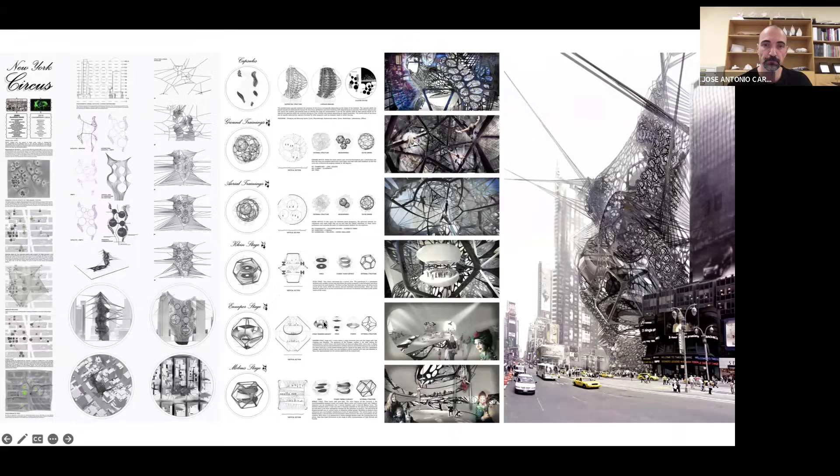As I mentioned, this was a great opportunity for me to deepen into Rhino and Grasshopper, which helped me out later to teach these tools at the university. This project was showcased and published in the third issue of the Evolo Skyscrapers volume, so anyone interested in knowing more about this New York circus can approach the project through this presentation.

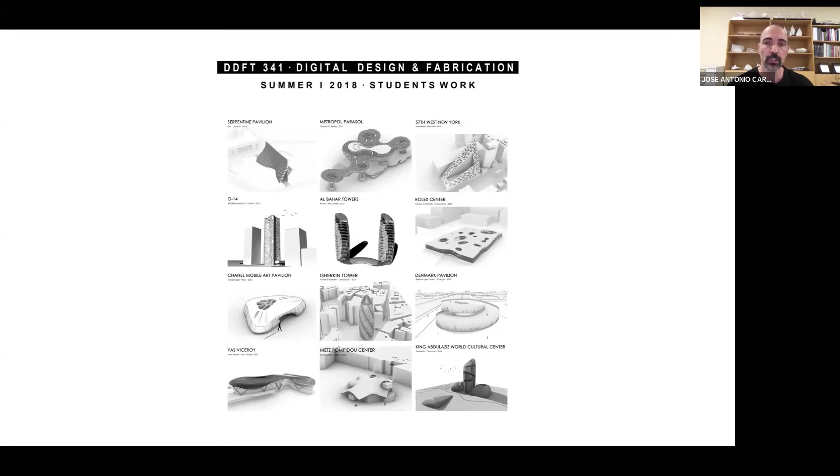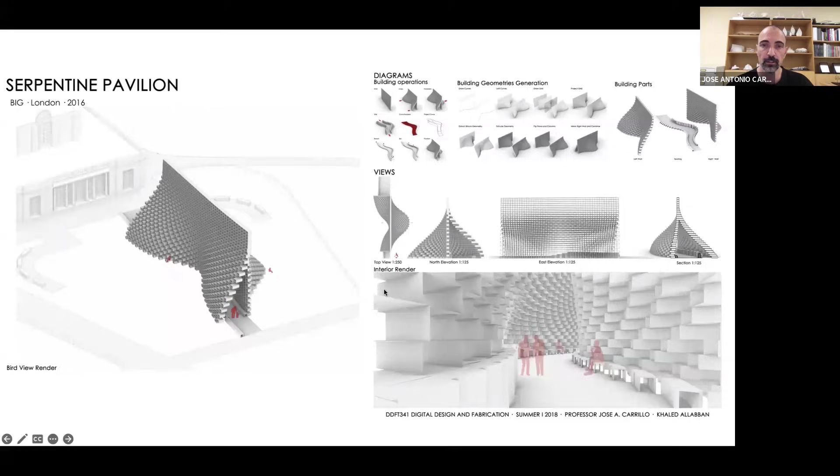In my early days instructing Rhino and Grasshopper at the university, as an architect I started having students select iconic buildings from all over the world that I found very interesting pedagogically, so they could first analyze the building to understand which topologies, geometries, surfaces, and curves were needed to generate the project. These are posters, works, and presentations from the students, where we were also happy to incorporate new display modes like Arctic to create nice architectural diagrams. Students were even exploring the animation tools of Rhino to create analysis of the processes - in this case, the design conception of the project.

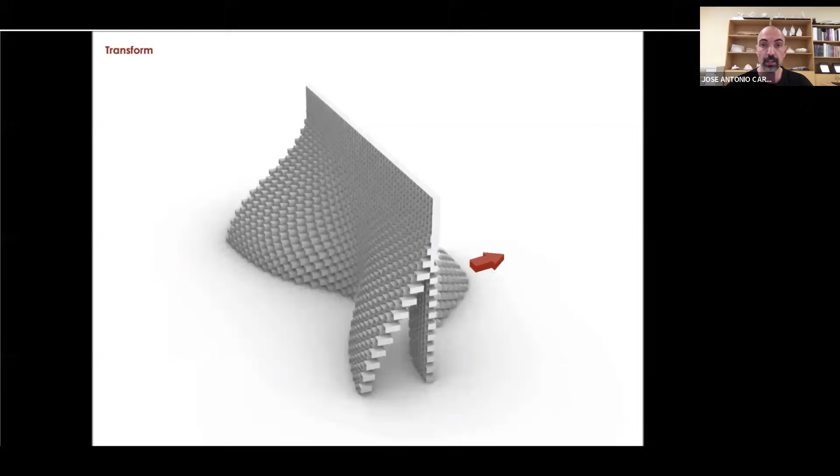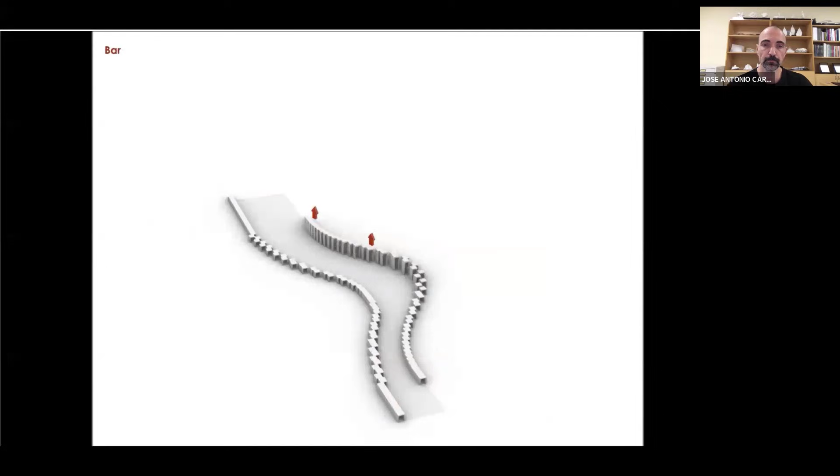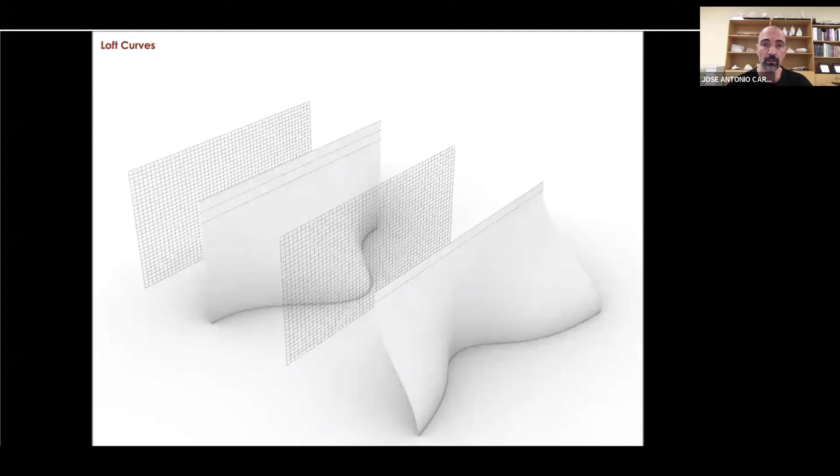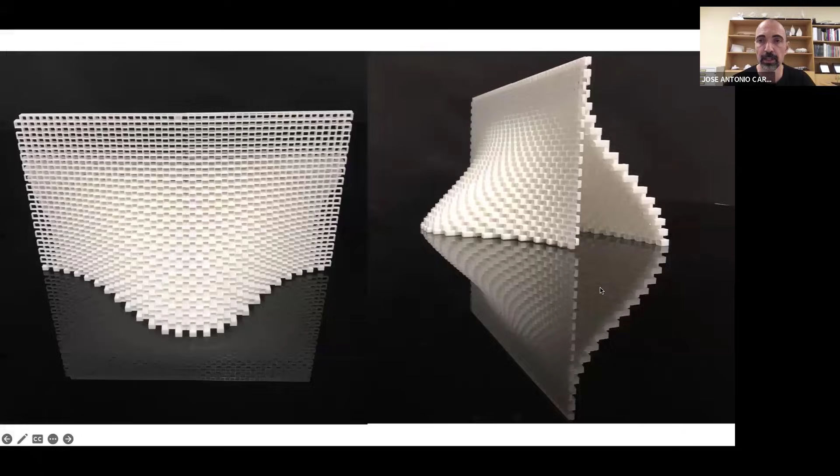We are presenting the Serpentine Pavilion by Bjarke Ingels here, showing the design workflow within Rhino: starting with generative curves, creating the surfaces, doing a grid, projecting the grid onto the surface, and then getting the bricks of the project. Of course, implementing Grasshopper provides more flexibility, so it was developed by the student using both Rhino and Grasshopper. Also in this course, I like to introduce digital fabrication - how to translate the design and geometry from Rhino to any kind of fabrication, like laser cutting, or in this example, 3D printing.

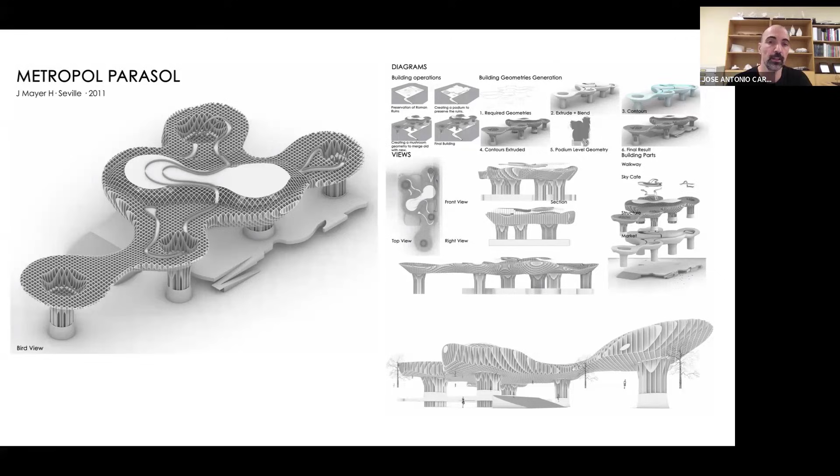And the students learn the constraints of fabricating as well. Some other examples of these iconic buildings are the Metropol Parasol building in Seville, Spain, the Rolex Center in Switzerland, or something closer to me here in the UAE, the W Hotel for the Formula One in Abu Dhabi.

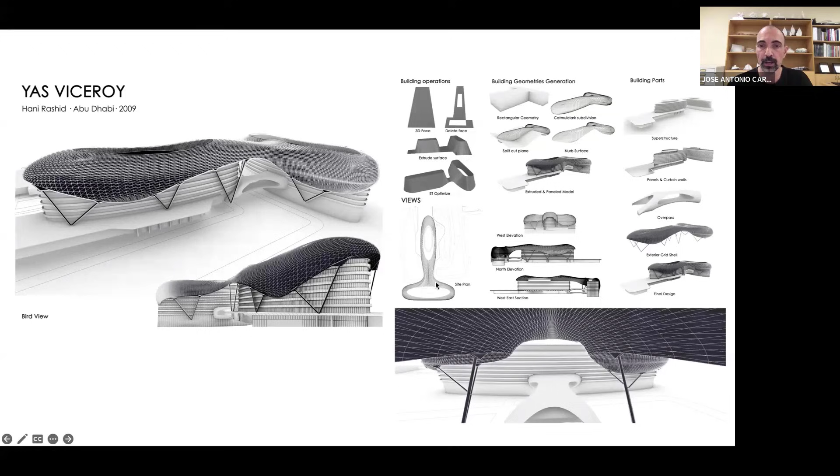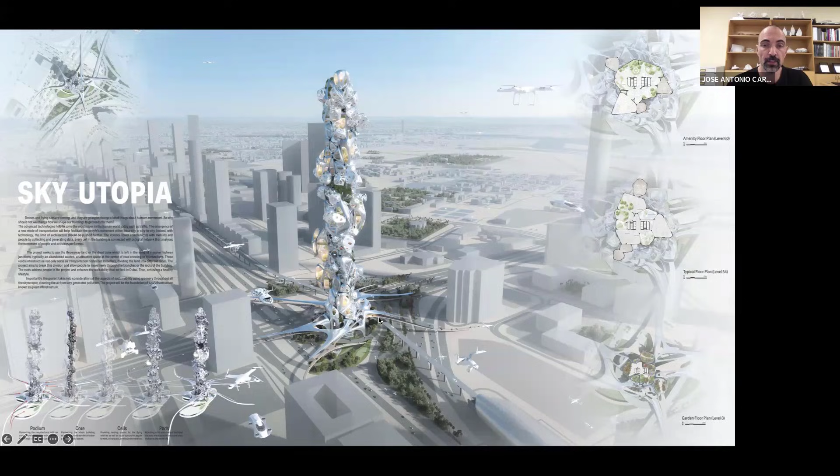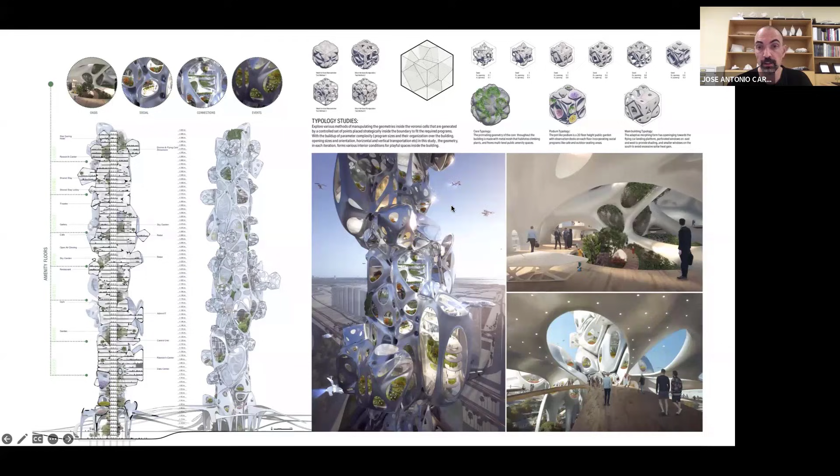Where Kangaroo, in this case, was used to do the relaxation of this mesh that mimics, we can see in the floor plan, the silhouette of a Formula One car. Also, as a professor of architecture, when I was instructing the graduation projects for the bachelor degree in the 5th year here in our program, students already skilled in Rhino and Grasshopper were capable to introduce these tools into the final project. In this project called Sky Utopia, the idea was to generate a tower to replace the mobility that in the future might be sky mobility. So the building typology completely changed, and the structure can accommodate urban pods where people can fly or get drones or deliveries, and the mobility goes to the sky, and all these spots and living environments are perfectly adapted to the new needs of transportation. All these diagrams were generated using Rhino and Grasshopper, as well as the renders, combining these render tools with V-Ray.

However, today I will be also sharing my vision of how computational design, digital fabrication, and generative AI tools commonly used in architecture in my field can inform and reshape other disciplines, such as gastronomy and food design.

I would like to start this transition chapter of the presentation by defining what is food design. I will quote a sentence from Dr. Francesca Zampollo. She is a doctor and researcher on food design, and in one of her recent publications, The Food Design History, she defined food design as the conscious and deliberate creative process that brings innovation to anything related to food and the act of eating across the entire food system.

My beginnings crossing food design and architecture can fit inside a grain of wheat. Everything else is a consequence.

One of the first projects relating architecture and gastronomy or food was this commission from a client where I was asked to solve a problem. The client had a penthouse, a new property, and the architect designing the project left this void with the intention to display a spiral staircase. We can notice that the location of the staircase is between the open kitchen and the living room, so this staircase became an obstacle in the communication, the view, and the fluidity of the space. The client's request was to check the possibility of having, instead of one spiral staircase interfering with the two spaces, only a single run staircase on this wall.

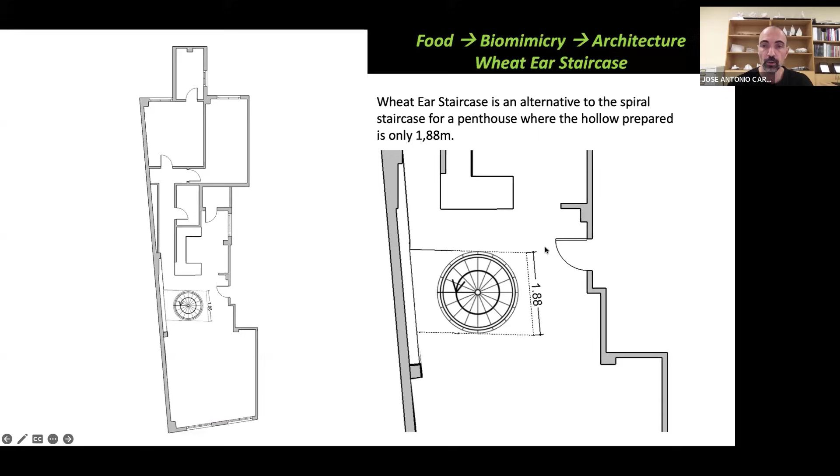I took the challenge, and in order to find the solution, I was doing some biomimicry studies. I studied the wheat ear plant because this plant has the feature of maximizing on one surface the maximum number of florets through the inclination of the different florets. For the regular tread of the steps, we get for this distance a tread of only 19 centimeters, which is comfortable for stepping up but a bit risky or dangerous to step down. Through these inclination studies, I was able to achieve a tread of 28 centimeters, which meets regulations and is also quite comfortable. You can see there is actually an overlap between the treads in order to achieve the feasibility of the design.

You can see here the relationship of the biomimicry: the floret of the wheat becomes the step, and the awn of the wheat became the wires. I should mention that these wires you see here are only for psychological safety, since they don't have any structural performance. All of the steps are welded onto a diagonal beam placed here, which you can see in this 3D view, next to the wall, going from the upper part of the slab to the lower part of the slab.

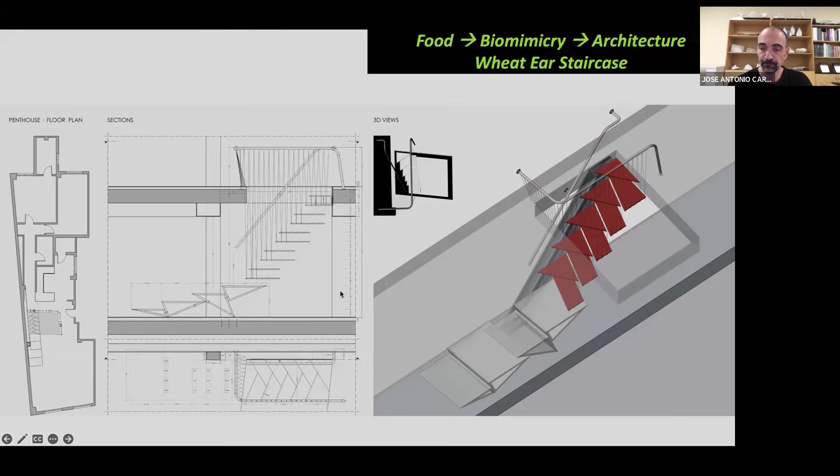I am also sharing some technical documentation generated during the construction process, all using Rhinoceros—2D drawings, technical drawings, construction details, and documentation for the workshops.

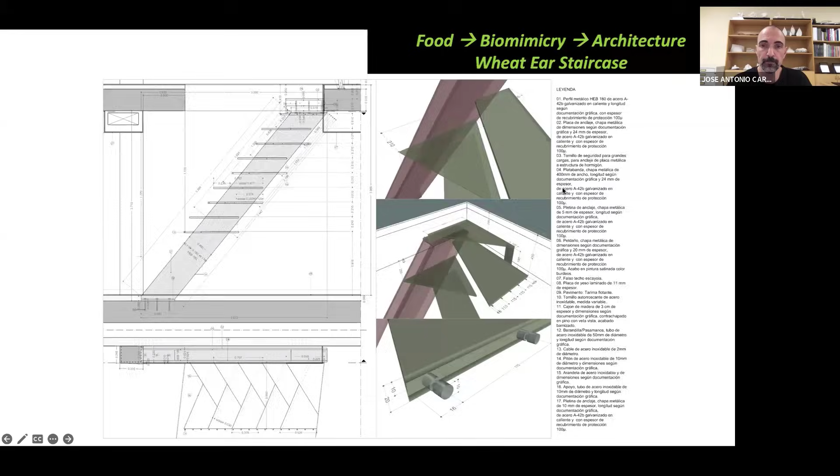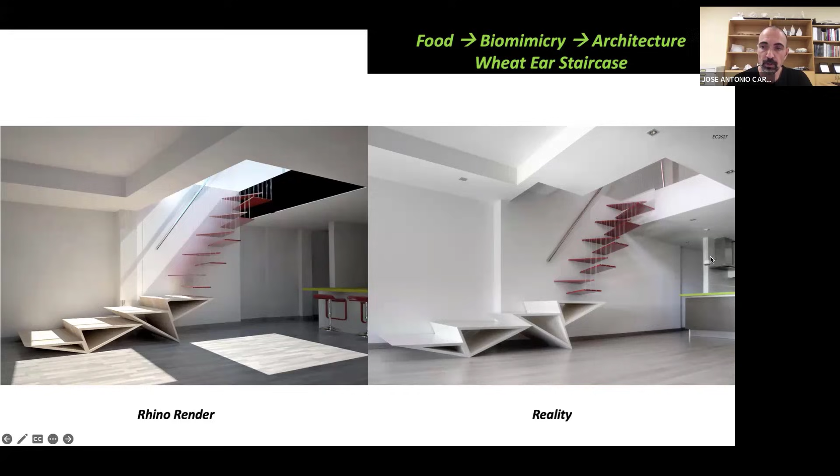The first render I presented to the client was this one, and it was accepted. On the right you can see the real picture after construction, and also the feeling of the space with this open kitchen without any kind of barrier.

I also removed the riser of the steps, so the only thing you see when you're in the kitchen cooking is an open view and very thin red lines coming out of the wall, like flying.

I bring this project for two reasons. The first is that it was my first relationship with gastronomy, using wheat as a biomimicry. The second is that the full design workflow was generated using Rhinoceros.

Reflecting on how food and biomimicry, nature-inspired design, helped me solve an architectural problem, I found myself asking two questions. The first is: how might architecture, along with digital design and fabrication processes, inspire and inform food design and gastronomy?

The concept of this chapel is bringing two helixes that cross and meet at the top. The metaphor is that when two people in life cross paths, at the end they meet and they commit, or they engage.

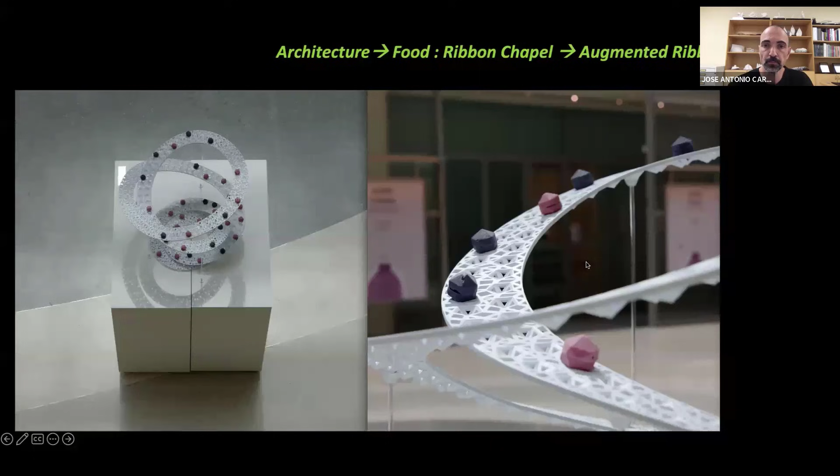After the trip to Japan and the augmented Ribbon project inspired by the Ribbon Chapel, my next question was: how can Rhino and Grasshopper become a bridge from architecture to other disciplines, turning the teaching of computational design into an innovative and highly engaging method?

This is the moment where I created and introduced the special topic course at the American University in Dubai, called archEatable.

The inspiration was to follow the idea of an algorithm, since I was eager to introduce Grasshopper. We can understand a traditional recipe as an algorithm—a sequence of steps, starting from annotations, ingredients, processes, outputs, next outputs, and final process.

I would like to quickly introduce the audience to what an algorithm is and how it relates to food. Basically, any algorithm has the same structure or building blocks: inputs, key processes, and outputs.

For example, if we think about making a cup of coffee, the main process happens in the coffee machine, but we need to feed this machine with inputs—the coffee beans, the water, and a source of heat. After processing this data in the machine, we get the output: the coffee.

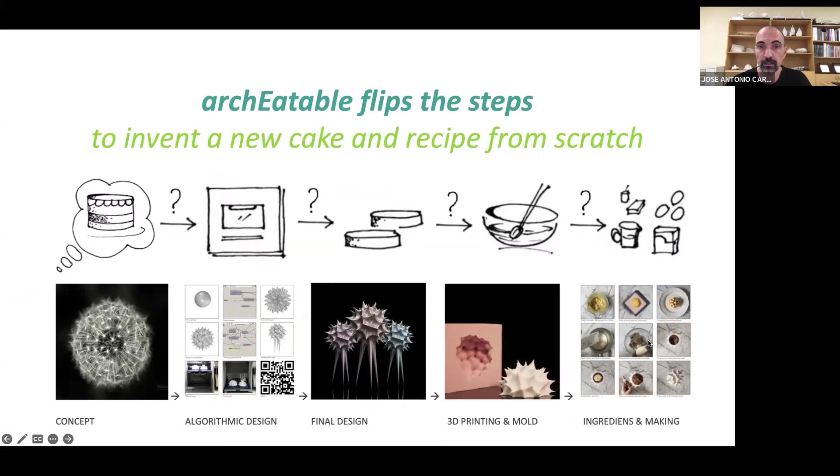This is one of the projects of the first edition. It's called Dandelion.

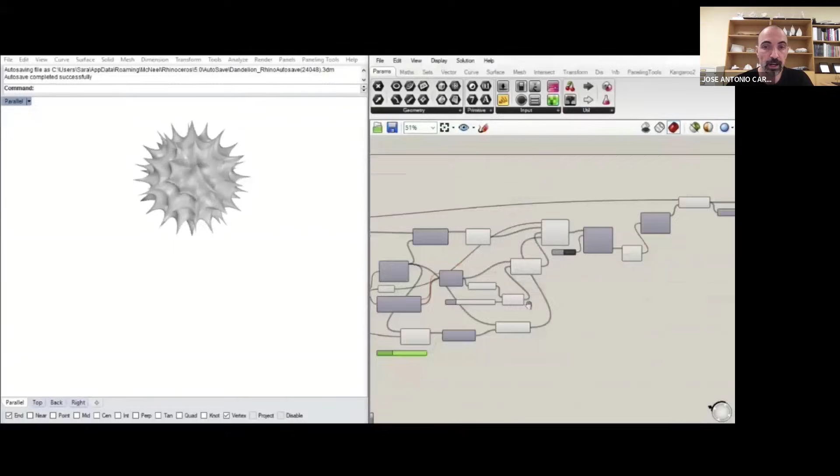We can see that this is a spherical, pointed shape done with kangaroo physics. It's a relaxation mesh. And then out of the three lower peaks, you can extend them to achieve or to get the legs. Also, the cake is split, so it has a lower part and an upper part.

This is the fabrication of the two parts. The part with the cap became the positive geometry for the mold, and this lower part became the cap or the base in order to hold the upper cake.

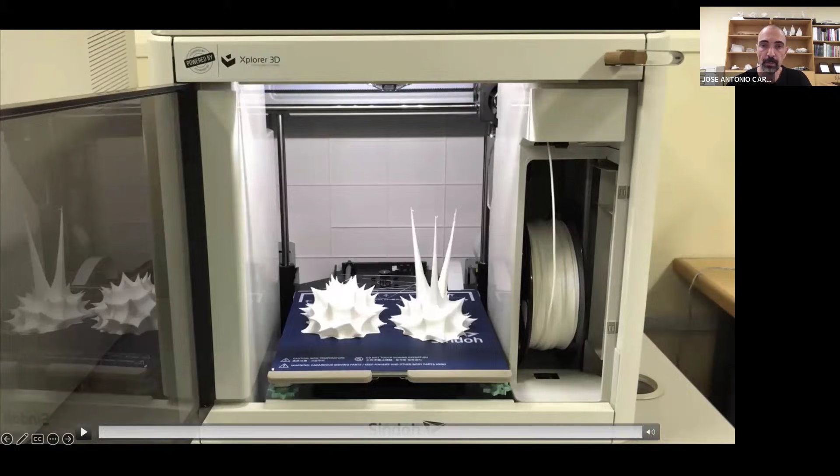In the second edition, because of the success of the first one, I got a lot of interest from professional chefs of the region, pastry chefs, who wanted to join the project. So it was a fantastic opportunity for us to collaborate with them, and also for the students to work one-on-one, making their designs come to life.

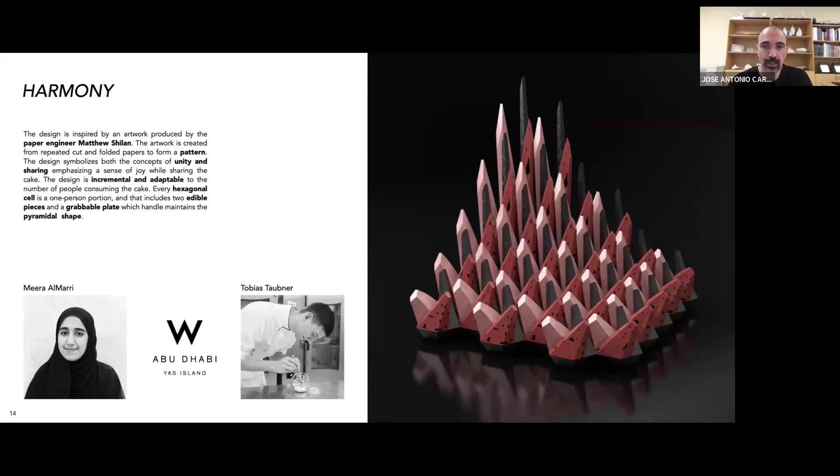So this second project is called Harmony, and it's also a very interesting project done with Rhino and Grasshopper. You can see here that for each of the cells there is a repetitive structure, and it's also sequential growth. Each of the cells has three parts.

We can differentiate them by the colors. We have the pink, the red, and the black. However, only the pink and the red are edible. The black one is not edible.

We are going to see here the process of the making, the silicone molds, and here the assembling with all the numbering. Also, nesting in Grasshopper was very helpful to arrange all the making.

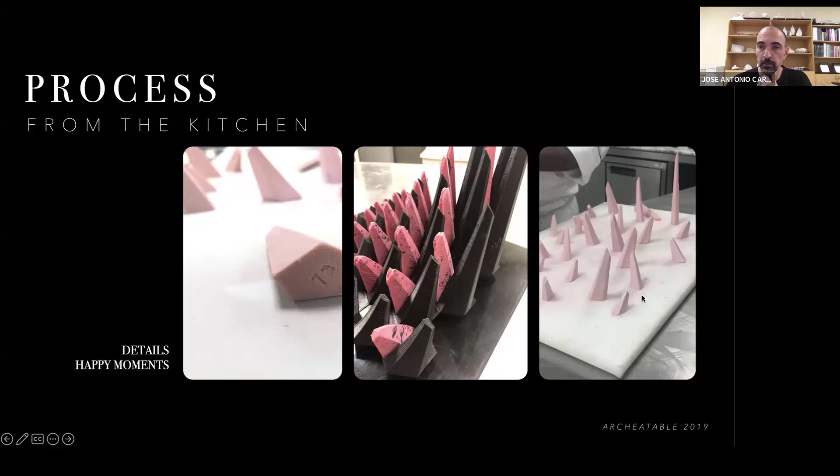Here we can see that the black pyramid is not edible because it's the spoon of each of the bonbons. But the spoon has the same geometry as the edible bonbons. So these hexagonal cells can grow in any direction, and you can accommodate the other bonbons until the final configuration of the cake, where the spoon is completely integrated within the design.

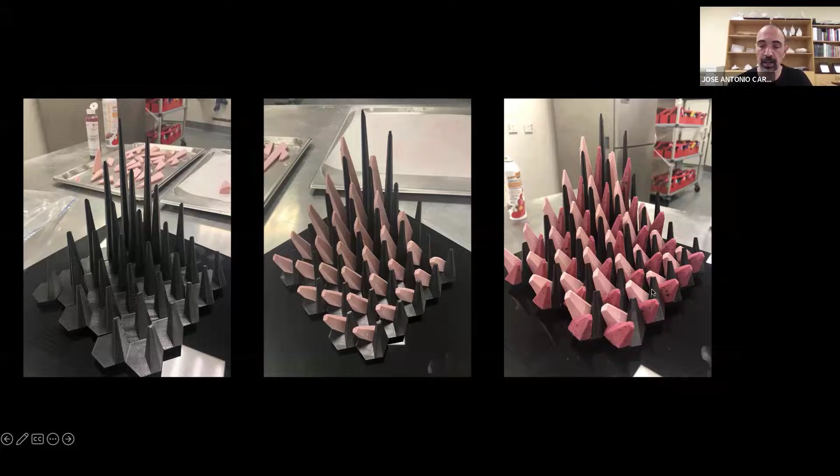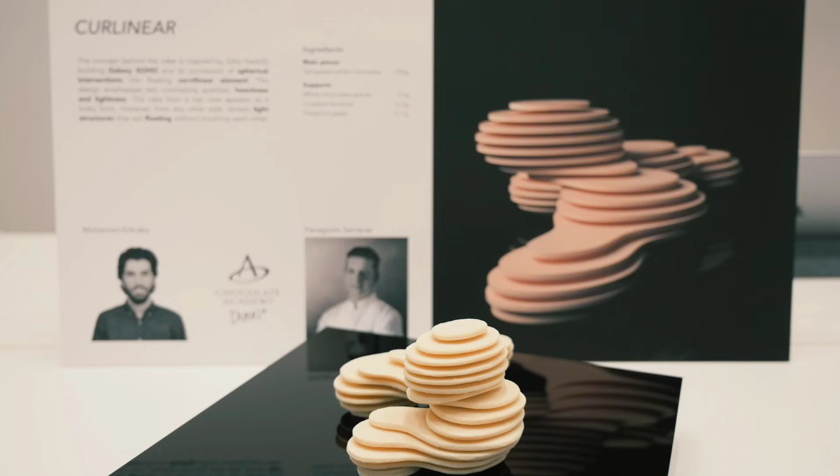At the end of this event, we also had the jurors evaluating the design and the execution of the cakes. It was also a very nice educational experience for everybody.

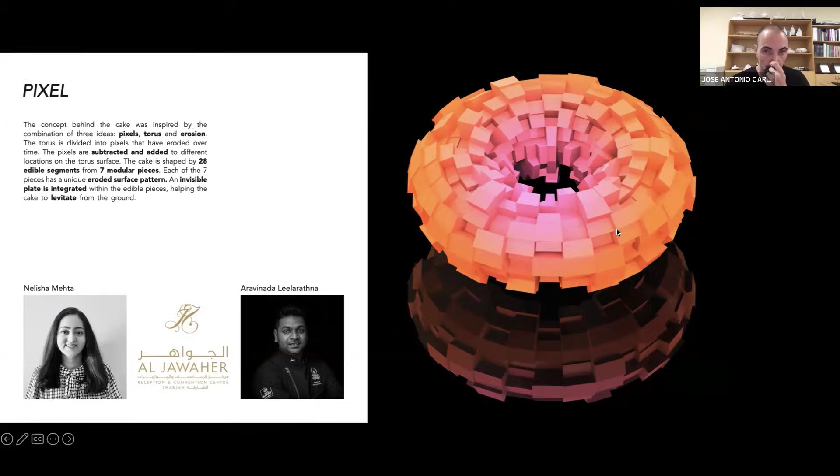We are going to see now one video of the full process of the making and the collaboration with the chef.

Hello, my name is Aravinada Leelarathna. I am the Executive Sous-Chef of Al Jawaher Reception and Convention Center, Sharjah. I started working with Al Jawaher from 2009. I joined as a pastry chef, then I was promoted to Executive Sous-Chef.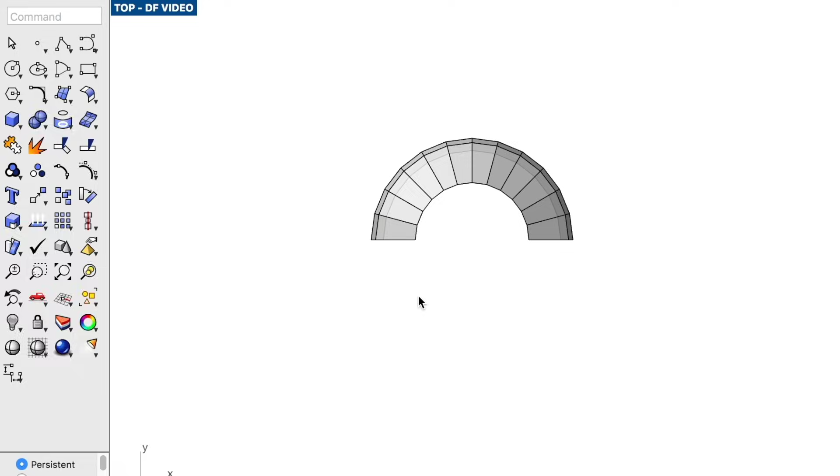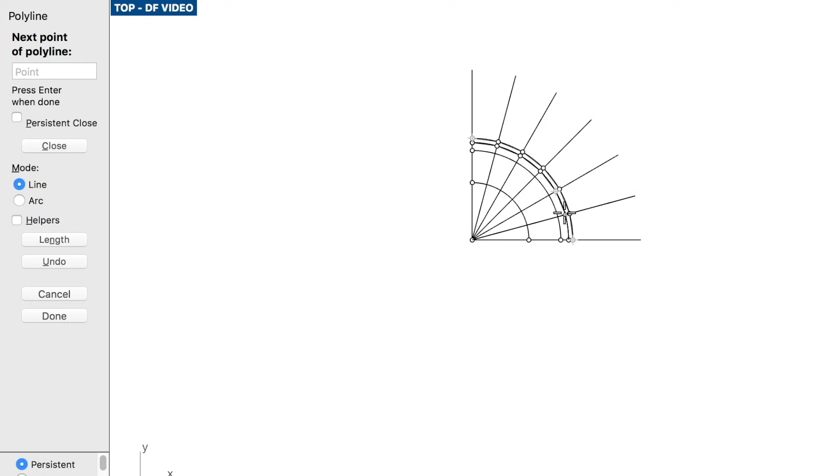Hello, my name is Narisha Mehta and I'm a future architect from American University, Dubai. The concept behind the pixel dish was inspired by the combination of three ideas: the pixel, the torus, and erosion. The torus is divided into pixels that have eroded over time. The pixels are subtracted and added in different locations on the torus surface. The dish is formed by 28 chocolate segments from 7 modular pieces, each with a unique eroded surface pattern. The plate is integrated within the edible pieces, helping the dish to levitate from the ground.

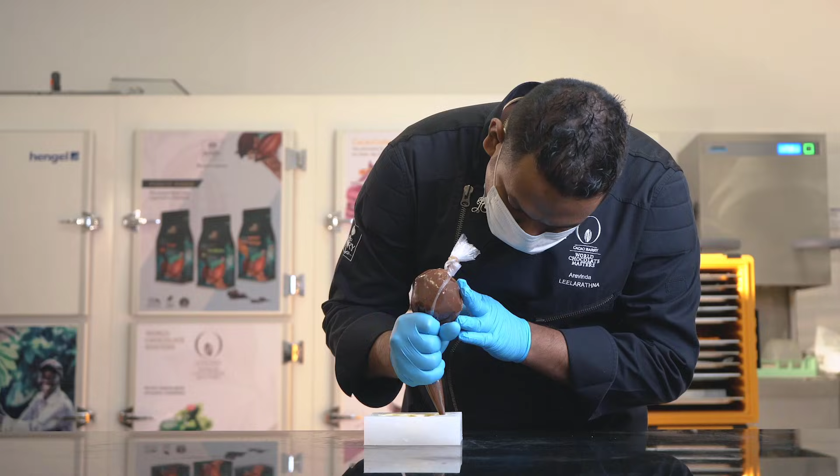The main ingredients today: bar tablet, hazelnut crunch, and calamansi and apricot jelly. Then we add dark chocolate and orange ganache, and white chocolate to balance the flavors and sweetness. Then we have unique colors to give it more future-like color.

It's interesting to mention that this cake was designed by the student using only Rhino. Because of the complexity, it took her some time. And I would like now to make a live demo about how we can approach this pixel cake in Grasshopper.

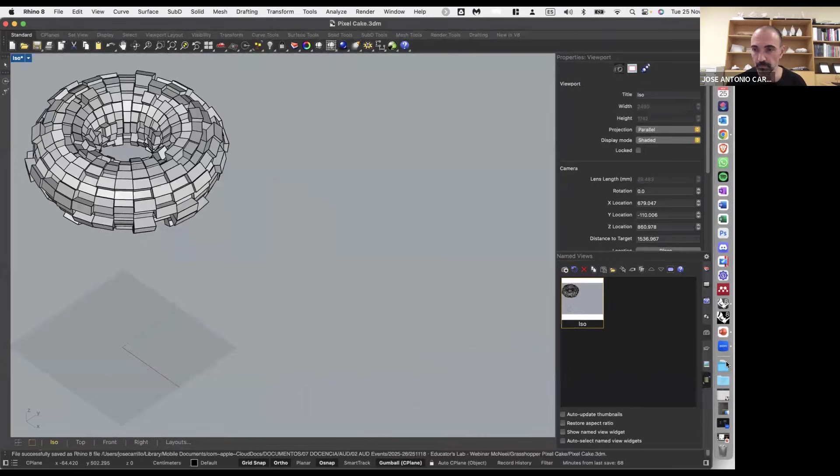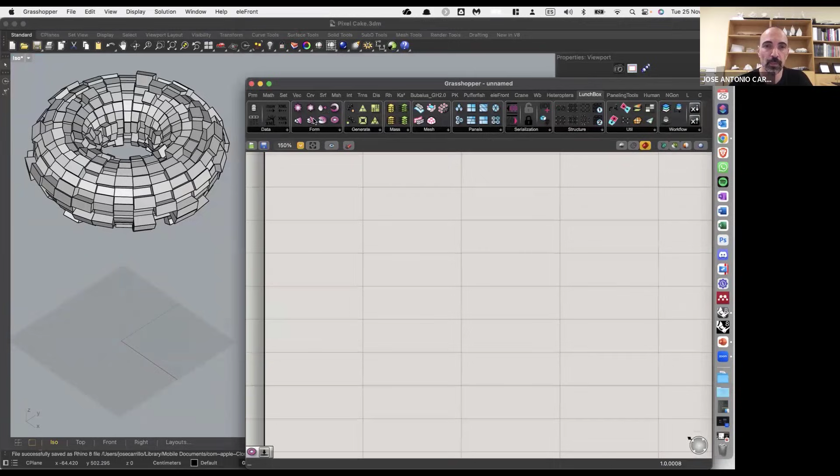I just place here the geometry of the pixel cake as a reference in order for us to have a visual of the aim target design. Let me make this a bit lower so it doesn't interfere with the presentation. And in order to start and get this torus shape, I think we can use Lunchbox.

Also, the name of the plugin is fantastic for this exercise. So we can bring the torus surface, which is the base geometry that we are going to need for this cake. The most important part at the beginning is to set the dimensions of the cake. In general, these cakes used to have a diameter of 30 centimeters approximately.

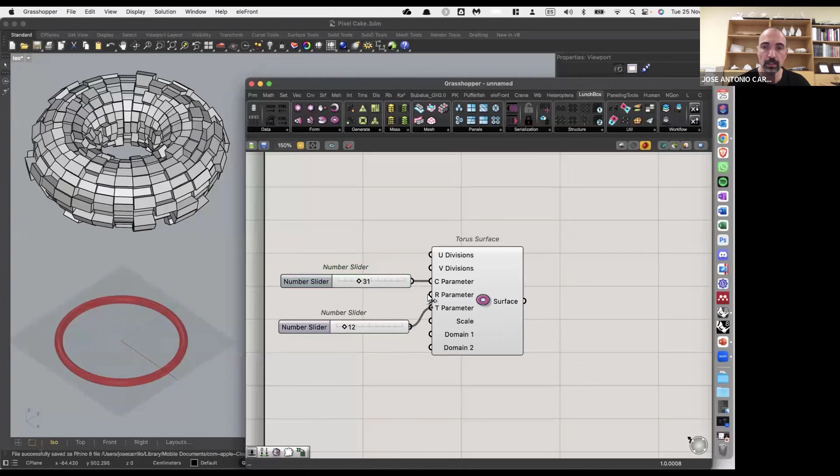So we can link this to the C parameter, so we get the outer radius of the cake, something like 30, 32 approximately. And then for the internal radius, by default is 2 — the section of the cake for each slice is something about 12 centimeters. So we can play this slider here, and we have the base surface ready as a traditional torus shape.

But in this case, our aim is to create pixels around this surface. We are going to define the number of sections or divisions around the V direction, and also the number of pixels for each of the sections. In order to achieve that, we need to bring twisted boxes on the surface — we can use the surface box component.

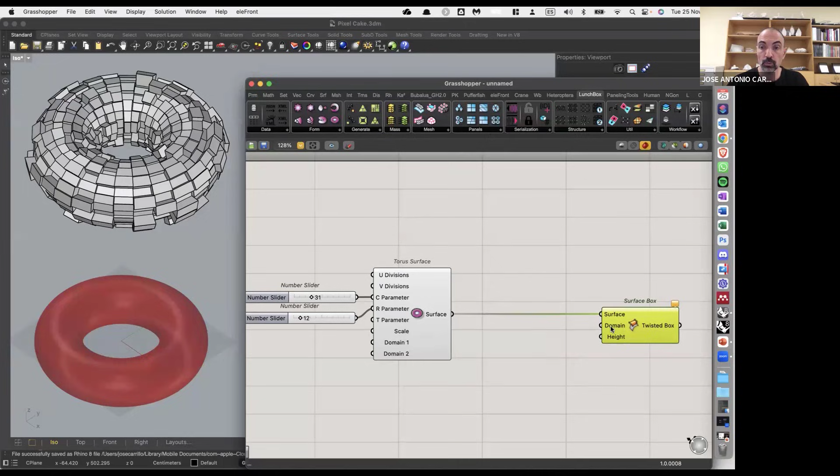The input is our surface, and what we need to do is build the domain of the surface. We need to subdivide the U and the V direction. For that, we need divide domain — in this case, divide domain square, because we need both dimensions, U count and V count. For the domain, let's plug the surface.

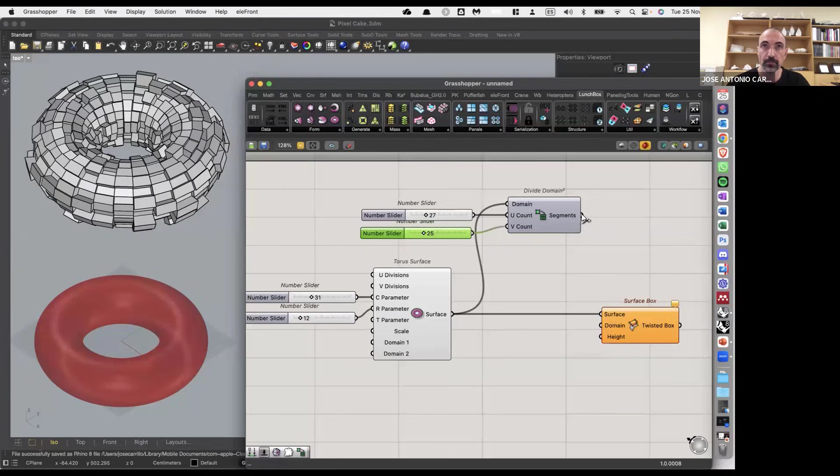Now we can define properly the U count and the V count with two sliders. The U count is going to represent the number of slides, the one around the Z axis — we can put something like 27 or 28. And the V count is going to be the number of pixels for each slide, something around 25, 26. Later we can manipulate this easily, and this can be plugged to the domain. We can see automatically how we can play with the number of divisions, how many slides we want, and the amount of pixels per slide. All right, very good.

The third input missing in the surface box is the height, which is the extrusion of these pixels. As you can see, the height in the final cake is different for each pixel, so it's randomized. In order to achieve that, we are going to incorporate a random component, and for the range we will need to construct a domain that sets the minimum offset and maximum offset distance of these extrusions. So let's construct the domain.

By default, it's going from 0 to 1. Because we want the pixels to be on the surface of the torus, we don't need to set any new value for the domain start. 0 is perfectly fine. And for the domain end, we are going to put something like 38 for the extrusion of the pixel.

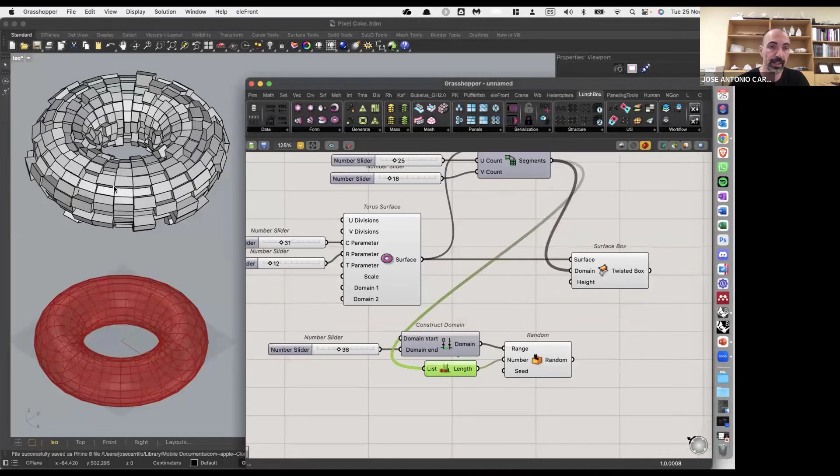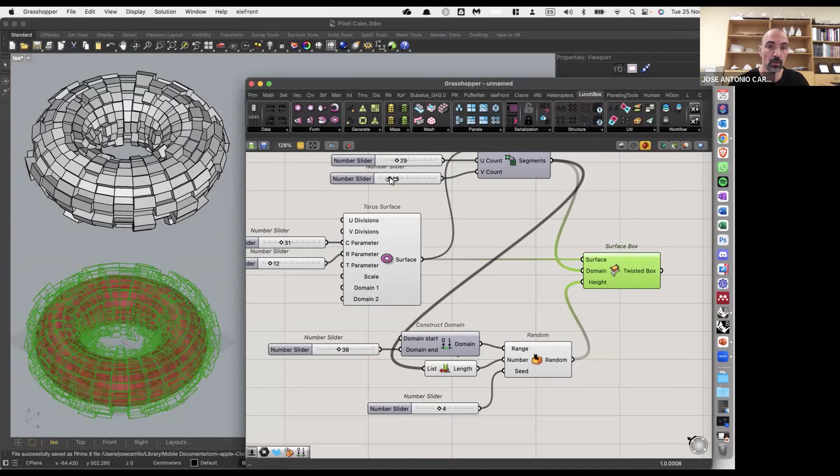number, and also the seed, in order to have variations, is also a very interesting input to feed. We just put one slider with any random number. Later we can play around. And when we plug the random heights with the height input, we can see already the pixelization of all the slides. Playing with the seed, we can have variations. And then with the sliders, we can get more slides, more pixels, less pixels, etc.

Once we have these wireframes or twisted box, the next step will be to morph a box within these wireframes. So let's place a center box here on the canvas. And we will use this center box to be morphed into the boxes.

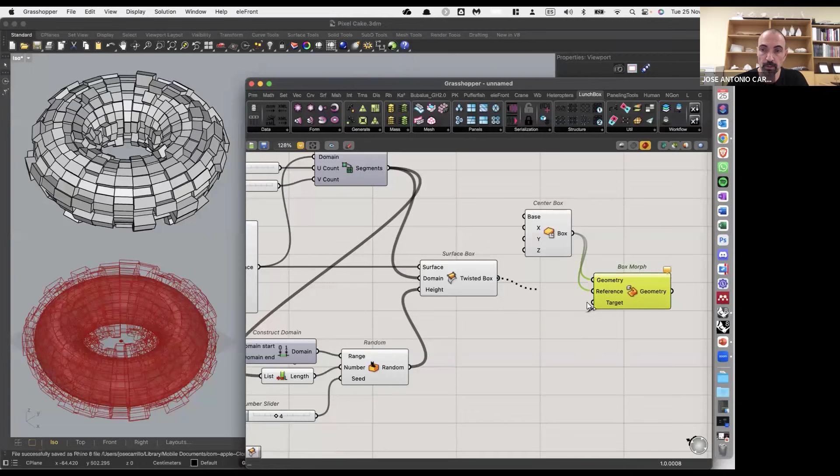So we bring on canvas the box morph component. The geometry and the reference is going to be this center box. And the target is going to be the twisted box. It's taking some time, but we can see now how the boxes are being morphed into the wireframe of the previous surface box.

And if we are happy with the output, we are done. The only thing we have to do is to bake this geometry, and we will get, I will group. We will get the pixel cake as we have it here.

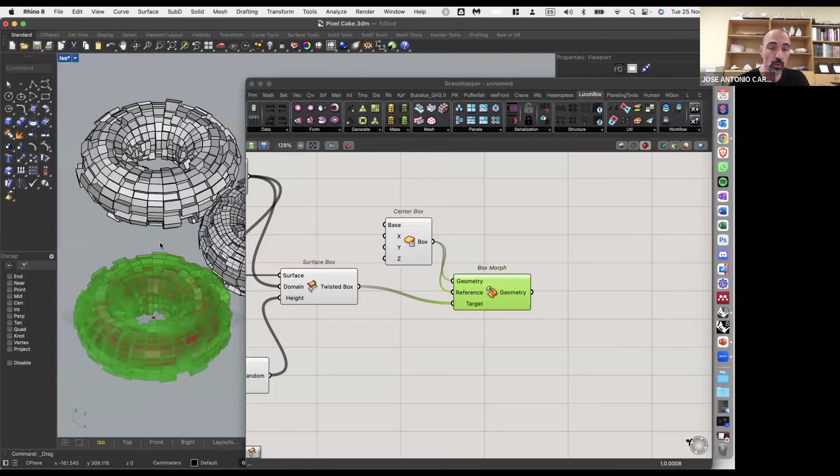If we don't want to see the representation of the isocurves, we can hide the isocurves in Rhino. And also, once we have this design, it's pretty easy to do some modifications, some variations. Let's say, for example, we can use the box mapping. And we can play around the same. We can hide the output here.

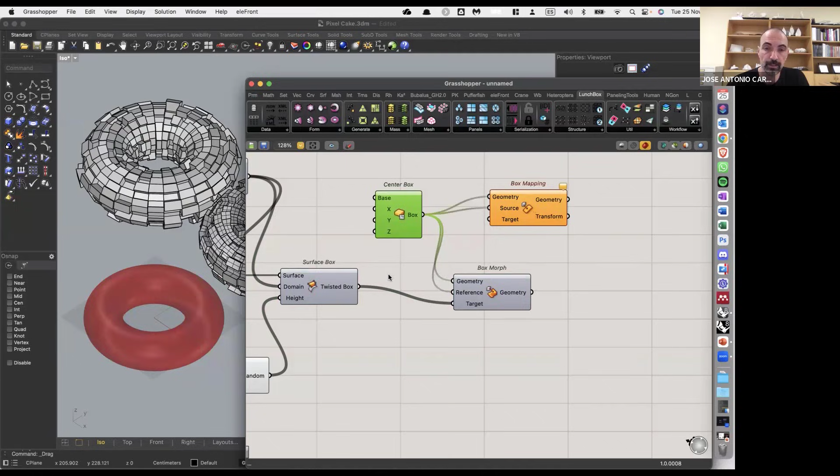And we can input the geometry and the source, which is the box. But the target now will create a box mapping cake. If I bake, I will group the output. We have here a second variation of a pixel cake quickly developed from the initial geometry.

So the flexibility of using Grasshopper, as we know, is huge and gives us a lot of possibilities for creativity and design. So you can approach this design and practice, and also 3D print, creating the molds and making your first pixel cake.

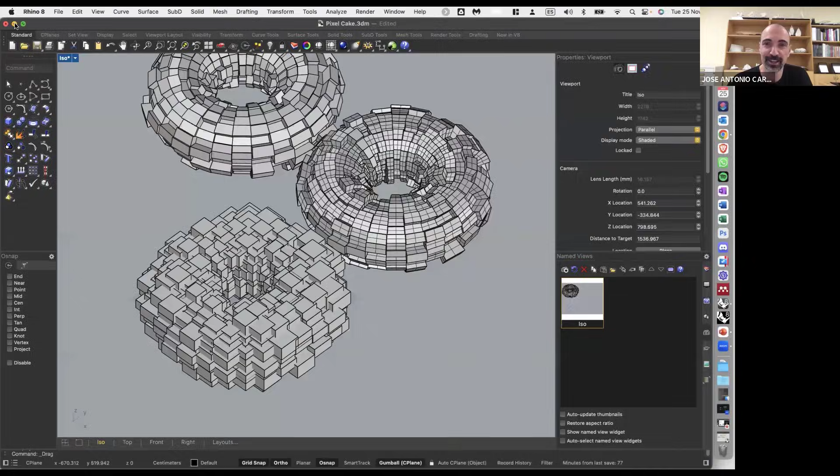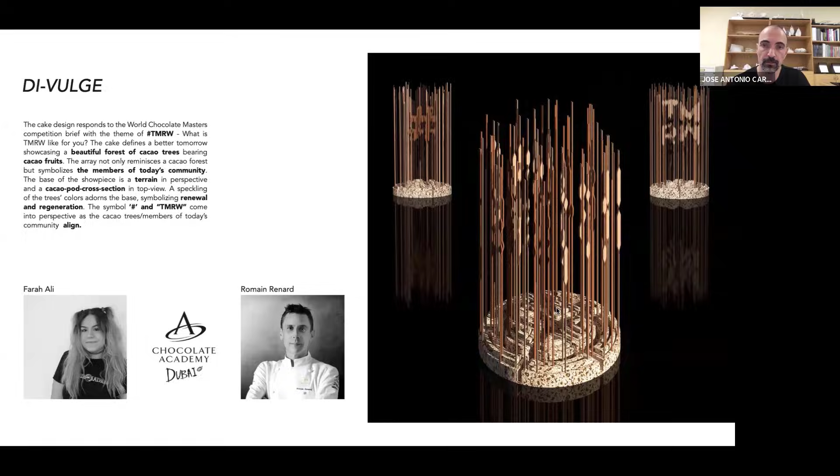So the cake was integrating the requirements of the competition, but thanks to Grasshopper, it was fully invisible or visible according or depending on the perspective viewpoint. Making this cake come true was quite challenging because these chocolate bars were 1 meter long and the thickness was only 4 millimeters. Now there is a short video where you can see a bit of the design process and the cake making. We're here to empower the artisans to craft the future.

Since we were in a pandemic, this event's final presentation of the projects was broadcasted online, and I had the honor to invite pastry chefs and jurors from all over the world. It was a very successful event.

This is the collection of projects developed by the students in the course Architable. As I mentioned before, you have the documentaries of the projects on the YouTube channel and also on the Instagram account if you want to know more details about the design, the making, and the collaboration with the pastry chefs.

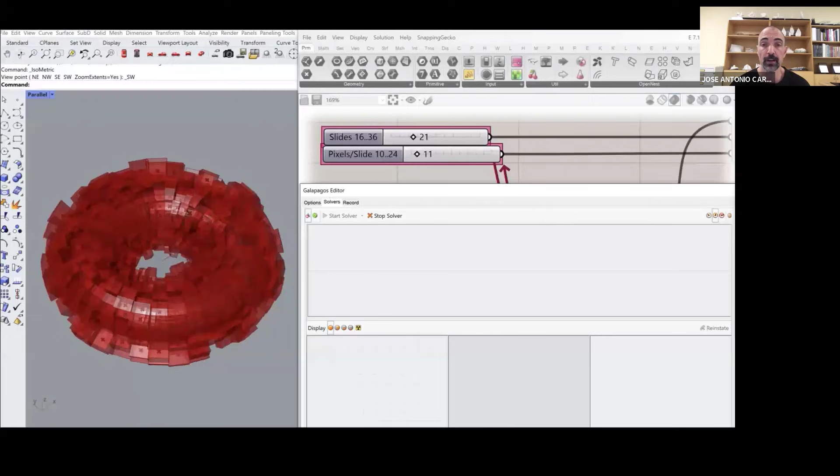You can see Galapagos running the evaluation of all the generations and outputting, in the lower right part, the fitness value of the volume. The volume is the variable to optimize, and the target is to have the minimum volume. You can see the different generations organized on the right side of the screen, always keeping the minimum value at the top.

That's why it's very easy at the end to select the combination that delivers the cake with the minimum volume, or on the contrary, if your fitness value for the volume is the opposite, the maximum cake volume. In this way, you can save ingredients, which could have an important economical impact on the production of the cake.

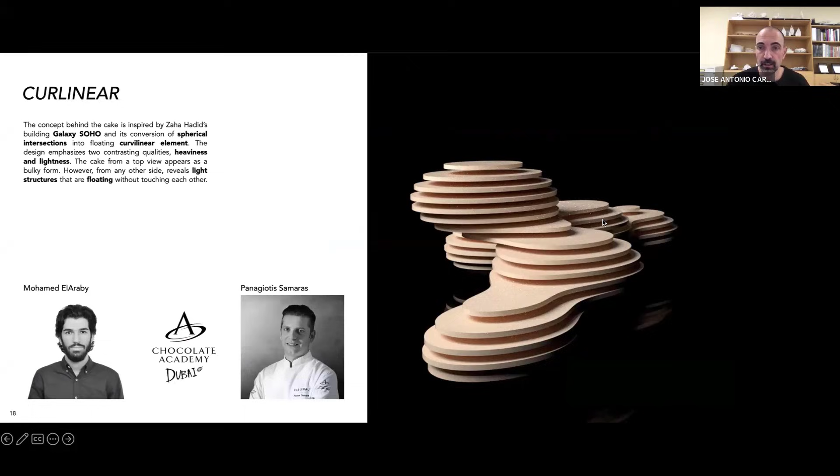For one of the cakes, named Curlinear, inspired by the Galaxy Soho building by Zaha Hadid, this cake can be displayed in space in any 360 position, so we can rotate around the cake. The optimization here was to find the minimum box to fit the cake in.

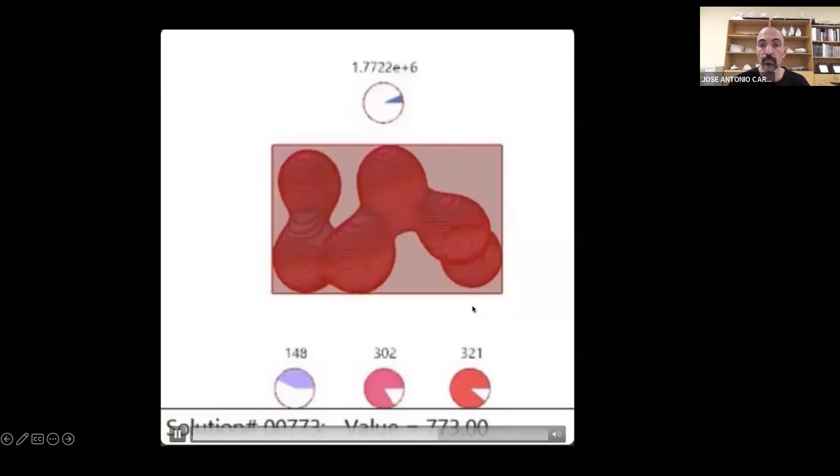The value running here at the top is the volume. You can see here the rotation around the three axes, X, Y, and Z, and the different solutions for the different generations. Towards the end of the analysis, the cake rotates less because it's finding the optimal position to minimize the volume, delivering exactly what we were looking for: the minimum packaging for this cake. So we are close to the final solution.

We can see here how the volume is decreasing until achieving the minimum volume box for this cake. So it's a way to optimize not only the cake, but also the packaging.

As editor-in-chief of issue number 4, I proposed this combination of gastronomy and architecture. The name gastrotecture, I think, represents the idea very well. These are the different publications of different architects, conversations between chefs, food designers, and gastronomic scientists.

I incorporated into the publication of the journal a workshop I did with architecture students, where they were asked to use Rhinoceros and Grasshopper for food representation. They had to select one of the most popular dishes from their region, city, or district, something related to their culture, and represent the food, the display, and the history telling using Rhino and Grasshopper to create these graphics.

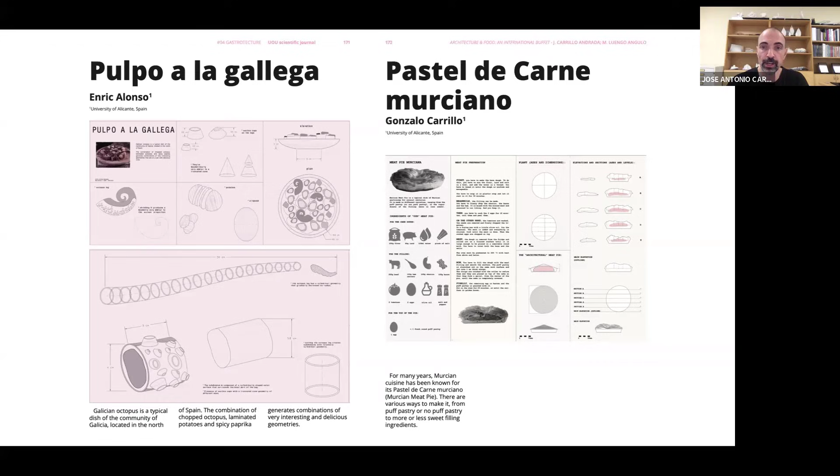The journal also hosts different workshops that I developed in collaboration with Jose La Rosa. Jose La Rosa is here—he's a biologist, and together we have gone through interesting research merging architecture, biomaterials, and computational design. I'm going to share a project we did together, which includes the work of students that was incorporated into the journal.

If anyone is interested in getting a copy of the journal, Gastrotecture, and learning more about this intersection of gastronomy and architecture, you can scan the QR code and get a free copy of the final journal. It's an open source journal.

These are the chapters I am developing in my ongoing thesis, connecting these two fields. The first chapter is about biogenerative architecture. The second is parametricism and computational food design, which is the topic of this presentation. The third is multisensorial experiences and virtual environments.

I am also working on the urban scale and food systems, how they can affect the scale of the city and urbanism. I am also very interested in blockchain, so there is a chapter on blockchain and NFTs related to food, and also generative AI, which of course is very relevant these days to be incorporated into design workflows and research.

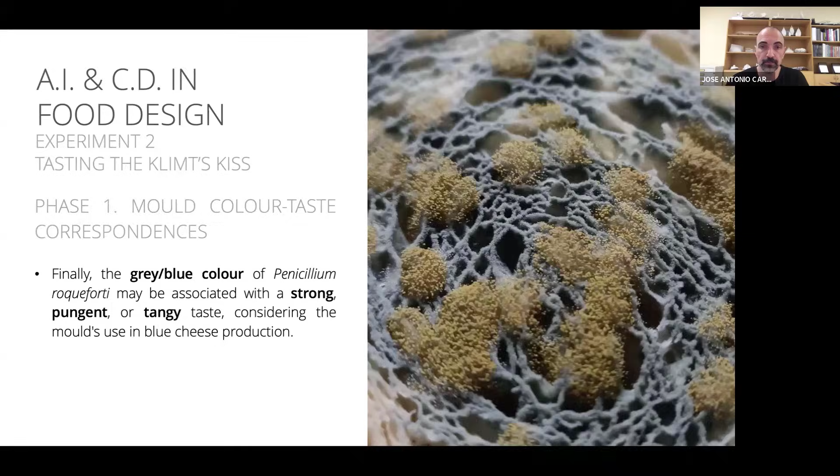Also, we did some gastrophysics studies to understand how the taste perception is built in our brain, and also the relationship with the different textures.

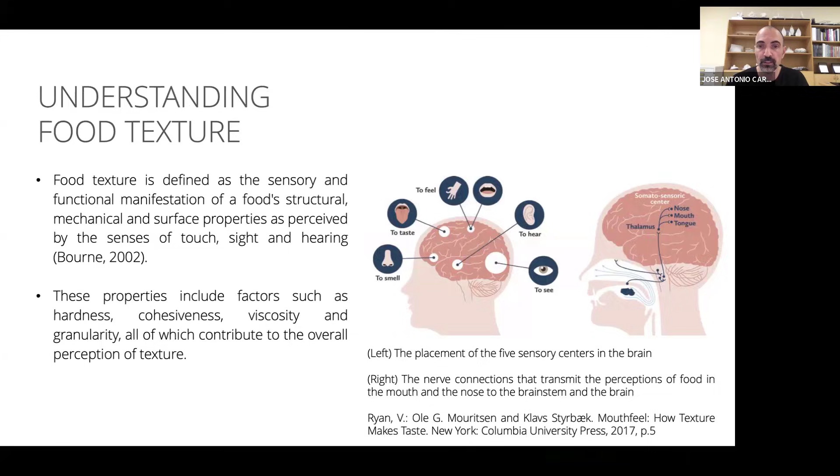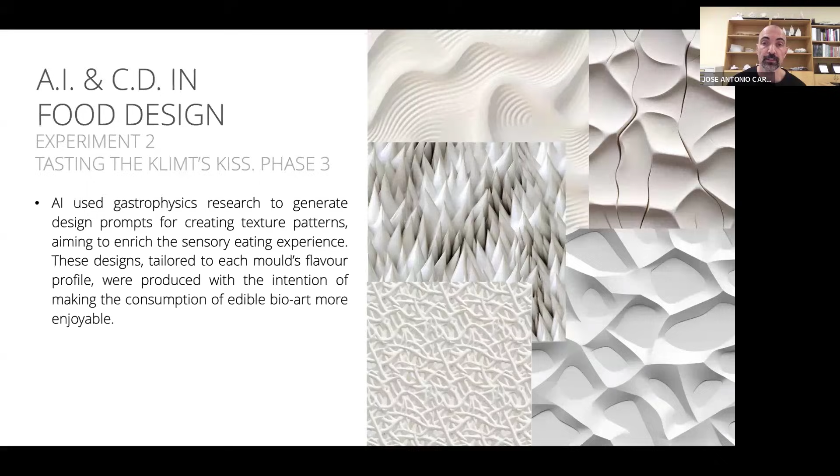So with the use of generative AI, we created the texture associated to the mold color and the mold taste perception. This is the texture for the white mold, something very fluid, very sweet, very dynamic. For the green mold, these are the prompts that we were feeding into the GPT, and all these prompts were informed by scientific papers on gastrophysics and biology about the molds. This is the output, the texture for the Aspergillus luchuensis, which has a very umami, earthy flavor.

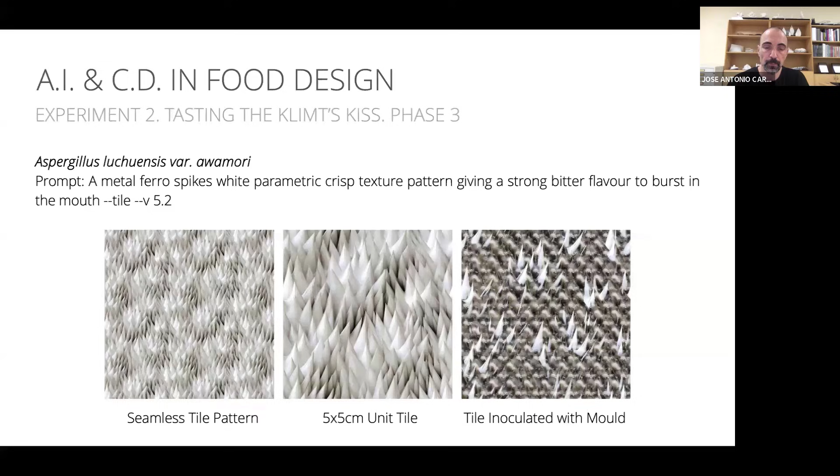You can see here the texture also represents this earthy pattern. For the black mold, something very spiky, very intense. And for the blue mold, something more branching, providing a chewy mouthfeel.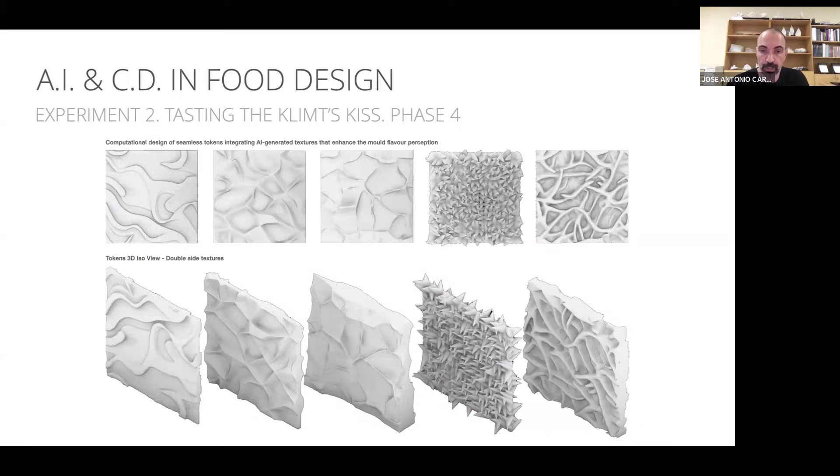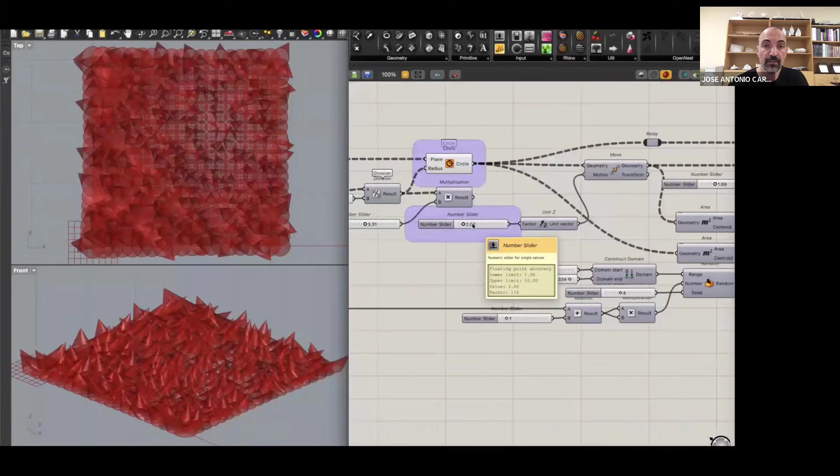The next step, after having the textures generated by generative AI, was to bring them into Rhino and Grasshopper. This is an example for the black mold, using a grid of cones in order to generate all these spikes and some attractors, with the idea to have different intensity mouthfeel while eating this mold.

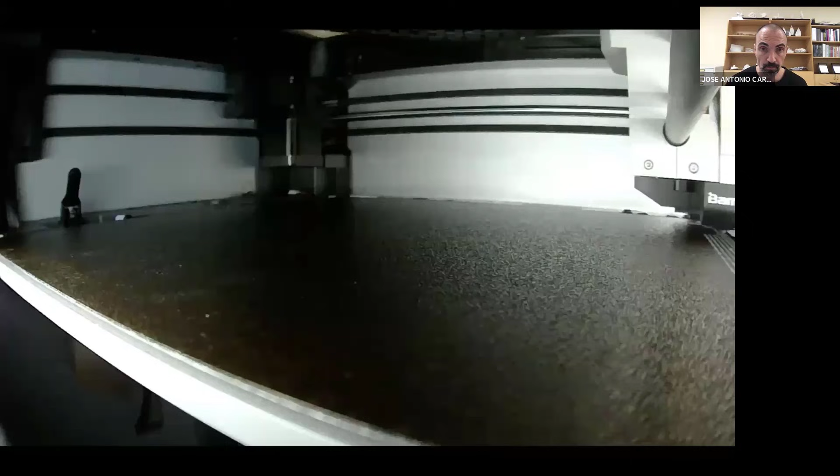It's important to mention that all these tiles later were 3D printed, and they became the cutlery to host the mold growth. So the cutlery has the texture that is correlated to the mold color and the mold taste.

So how do we relate this with the Klimt's Kiss? We broke down the Klimt's Kiss into a grid of rectangular cells, and then we were correlating the color of each cell with the closest color pattern of the 5 molds. So we were translating all these colors into only 5 colors, matching with our mold colors, only 5.

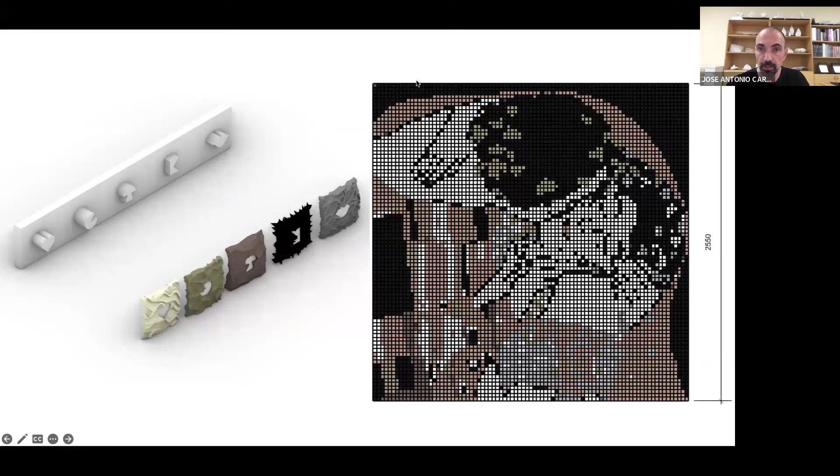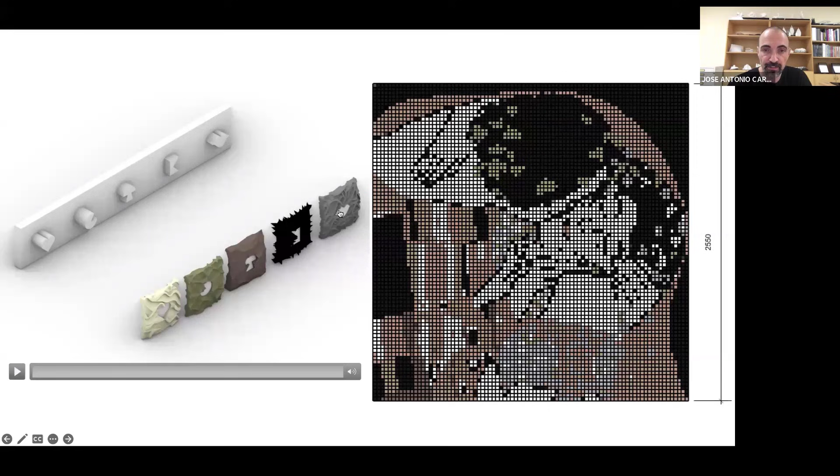Doing that, the idea is to have in the background a canvas with the male shape. This male representation, these icons, is like 'I love eating fungal Klimt's Kiss.' And you can see here the tiles with the female shape that, after tasting each of the molds, you can place these tiles back to the painting.

So in this experiment that is now under fabrication, what we will be presenting is a canvas of 2.5 meters with more than 7,000 tokens. And we will invite the audience. We are planning to display this at Dubai Art Fair. So we will be inviting the audience to try and to taste each of the molds from the original Klimt's Kiss.

And also afterward to place it into a new canvas where the saliva and the bacteria of the people will generate a new mold growth. That's why we don't know how the Kiss will aesthetically look, it's a big question mark. This is the idea of the experiment, to bring computational design, art, biomaterials, and generative AI into this creative work.

Lastly, to finalize the presentation, I would like also to share a professional collaboration. I do consultancy for chefs and brands that want to cater to the identity of the company or events through an edible piece. This is a collaboration for the Burj Al Arab Hotel here in Dubai, with the executive pastry chef, Tom Cole.

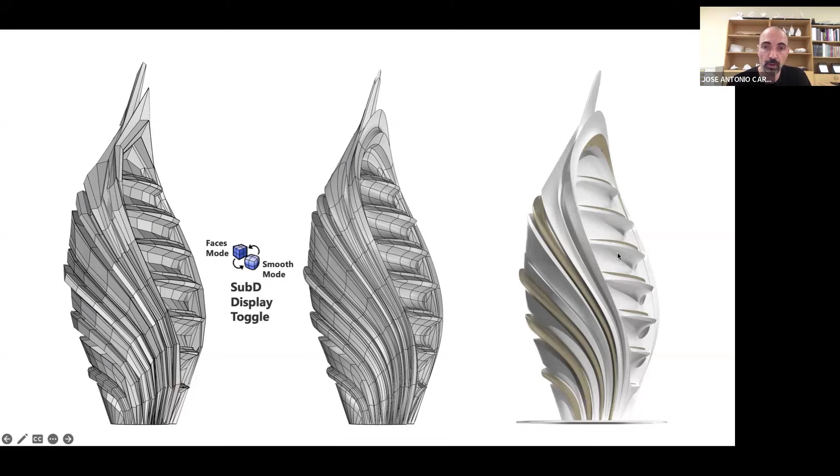And this is also a render done in Rhino, so the full process is within Rhino 8. This is a 3D printing of the piece for an exhibition that I did in Dubai.

Also, I created a painting stencil. You can see these golden ribbons were painted using a stencil. Otherwise, the timing to paint the cake can be substantial, so I provided this stencil to the chef, and the chefs went from 45 minutes painting the cake to only 5 minutes.

Luckily, I got the project also featured. This is the real cake, so this is fully edible.

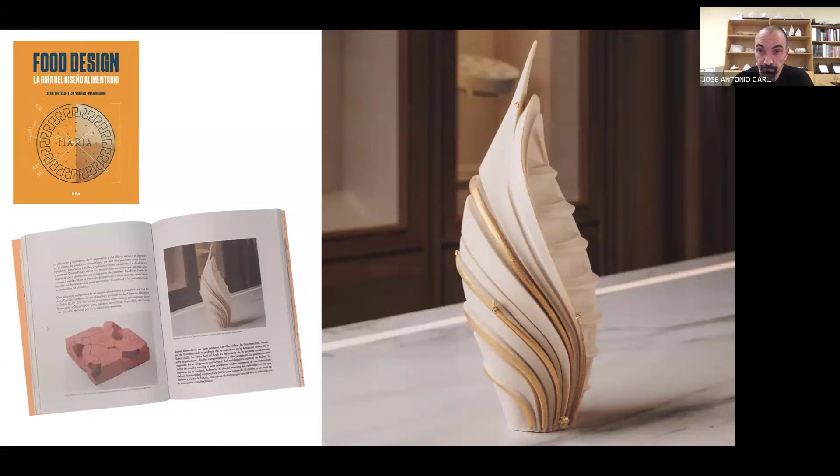And I got this project featured in the recently published book, The Guide of Food Design, along with some projects of Dinara Kasko. And you can find this cake available in the pastry shop Les Desserts in the Burj Al Arab. They have two versions, the dark chocolate cake and the white chocolate cake.

And here on the right, we are going to see one video about the cake making. I also manufacture the silicone molds and all the casting necessary to make this cake come true.

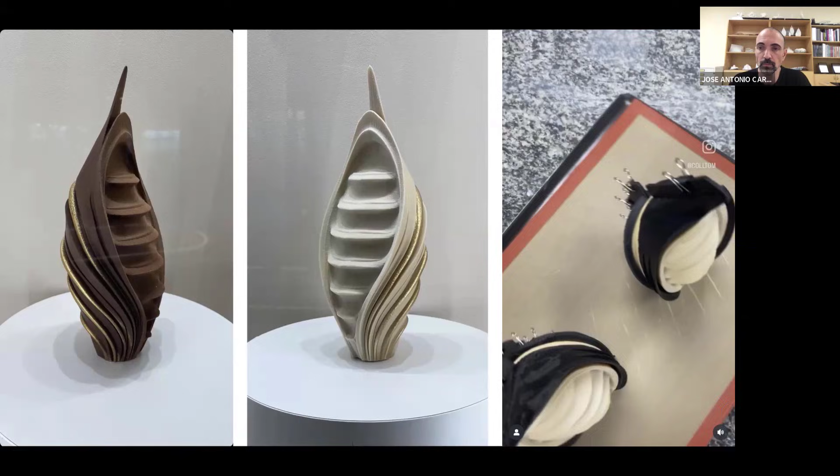I think we are opening our appetite with these cake presentations.

So it's always nice to see people from different backgrounds interested in learning computational tools and parametric design.